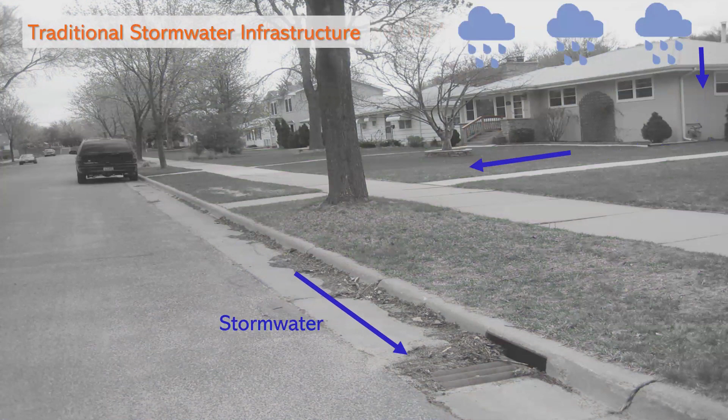But what we really have is traditional stormwater infrastructure in our communities, and it's really adapted to manage the stormwater. It really takes the rain off your roof, down the sidewalk, and into a storm drain. And we don't really think much about that. But when we concentrate it like this, we're really pushing our issues downstream. We're just getting rid of it, and there can be significant problems.

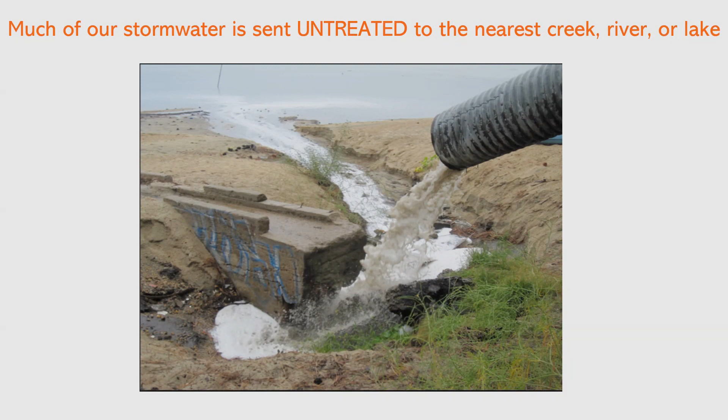What most people don't understand is that much of our stormwater that's coming off our roofs and our sidewalks and our parking lots is really going untreated into the nearest creek, river, or lake. And we're really having stormwater pollution issues. This is one of our bigger water pollution issues in our country. And you can see here, there's a lot of pollution happening.

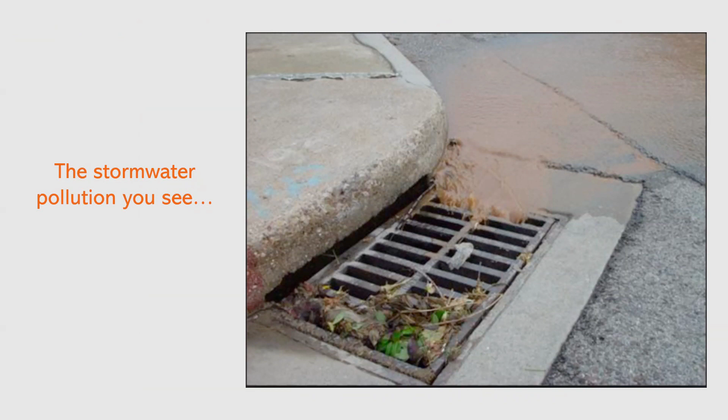Some of the things we can see: the dirty water, maybe a plastic wrapper, leaves and sticks going down the drain. But there's also a host of things that we can't see that stormwater is carrying with it. We have hydrocarbons from oils and leaks and drips from our cars. Our brake pads are producing copper dust that goes into our stormwater. That's really bad for fish and other aquatic animals.

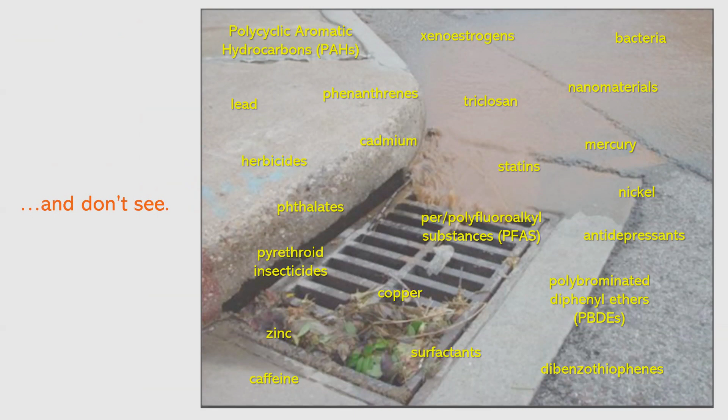We have insecticides and herbicides coming from our lawns. We have many heavy metals going down. We have things like PFAS that are going in from our water supply, and really they can produce really contaminating things. In addition, since we're concentrating the flow and just pushing it off our properties, what we can have is unintended consequences in terms of quantity of water coming down too, in too short of a time. So in many communities, particularly along the Great Lakes or in other communities with old stormwater infrastructure, we're having problems where all that water is just collecting and it has nowhere to go.

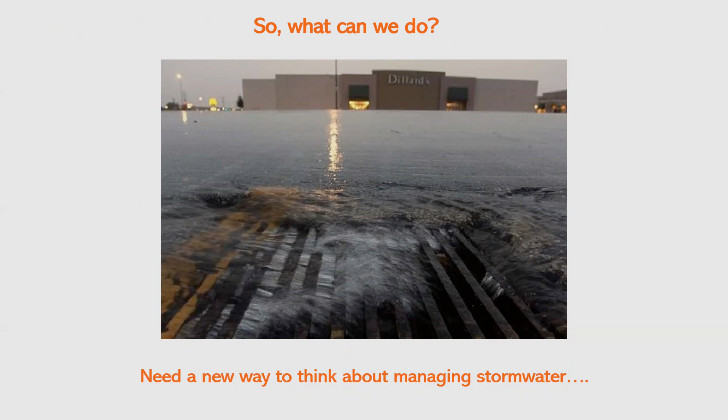And really causing some flooding issues locally in our communities. So what can we do? Well, what we really need to think about is a new way to think about managing stormwater. Right now we're just putting it all down the storm drain into the gutter and out into the nearest creek. Instead, we need to go back to about third grade and think a little bit more about the water cycle, how water moves in our atmosphere and across our land in general.

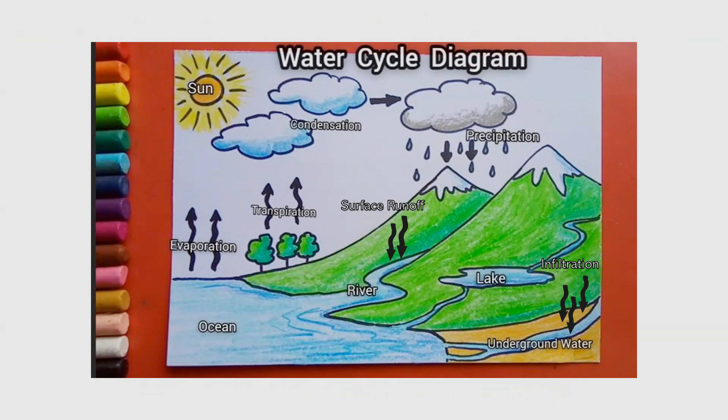So thinking about how water moves in general: it rains, it comes down, condenses on the land, and then runs off the land to your nearest creek or river, and eventually out to an ocean or a lake. On the way, it's stored, infiltrated into the ground into our groundwater, or it's stored and then evaporates, or the plants uptake it and it's transpired back into our atmosphere. So really thinking about the hydrological cycle that influences how water moves about on our landscape.

And that's really what we're thinking about when we're thinking about how to manage stormwater differently. We want to manage it as a resource rather than a waste, just trying to get rid of it.

So this is the Menomonee Valley Industrial Center Stormwater Park, built with green infrastructure in mind. This used to be the machine shop of the world in the 1800s and 1900s, and it was a brownfield site, very polluted in general. They turned it into an amazing 60-acre industrial park that has over 14 businesses, and all of their stormwater moves through this incredible wetland system designed to treat the water before it goes into the Menomonee River.

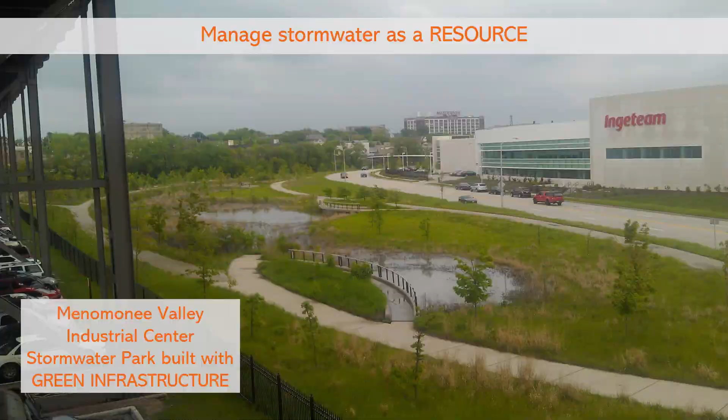So what is green infrastructure actually? Well, it could be natural landscapes, like floodplains, river systems, forests, wetlands, and fields. That could be green infrastructure because it's soaking up that water.

But in this context, what we're talking about today is really these engineered water management systems designed with natural features and functions. They're designed based on the hydrological cycle—how do we capture that water, soak it into the ground, have plants uptake it, really slow that water back down rather than shooting it downstream.

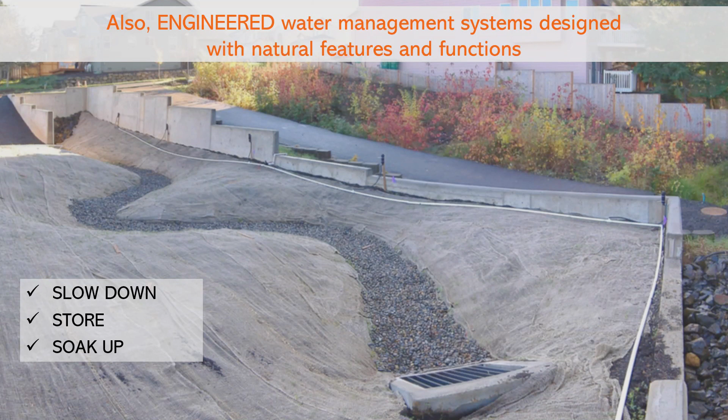So these are the principles we really want to work on integrating into stormwater management. One of the biggest principles is using native flowers and grasses. And you can see here why.

So we're really going to use the power of plants to actually store the water, soak it up from the ground, and get it into our groundwater.

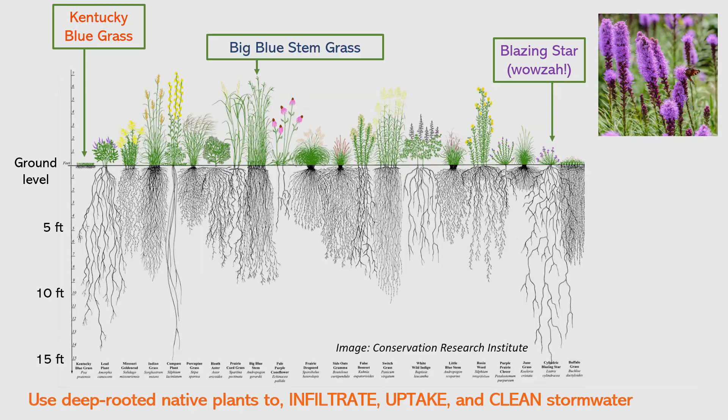Okay, so let's talk a little bit about green infrastructure systems. We can put them—there's many different kinds—and we're going to start at the top of our built environment, our roofs. There are many applications in general.

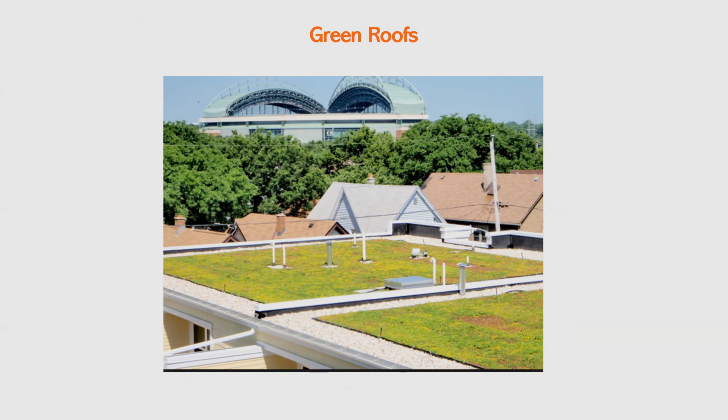So green roofs really are putting plants on top of the roofs. We have an impermeable layer, and then they capture that water, infiltrate it, and use transpiration through the plants to go back into the atmosphere.

They have enormous year-round energy savings for buildings because they provide an insulating factor. So in Wisconsin, we can insulate the building, and you can find a lot of energy savings just from heating and cooling. When it's hot in the summer, the plants take that heat and cool the building down, and in the winter, they provide an insulating factor. So the city of De Pere has found those energy savings from putting it on their city hall.

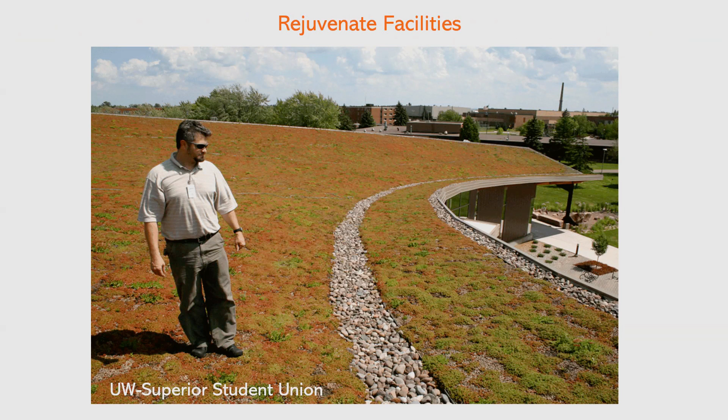They've also been used across Wisconsin in different environments to rejuvenate facilities, modernize buildings, and provide educational spaces in general. Where I am locally in Green Bay, one of our hospitals has a public green roof. It's for their employees, but it's also for the public and their patients, really supporting that interaction with nature and how that supports our health in general. It's a really wonderful space.

So really capturing that water. Going down the building, we can have green walls, kind of the same thing as a green roof, but you're capturing water as it goes down the wall and using it in aesthetic situations. You can have very intricate systems where art meets the master gardener, really using that water as a resource to water your plants.

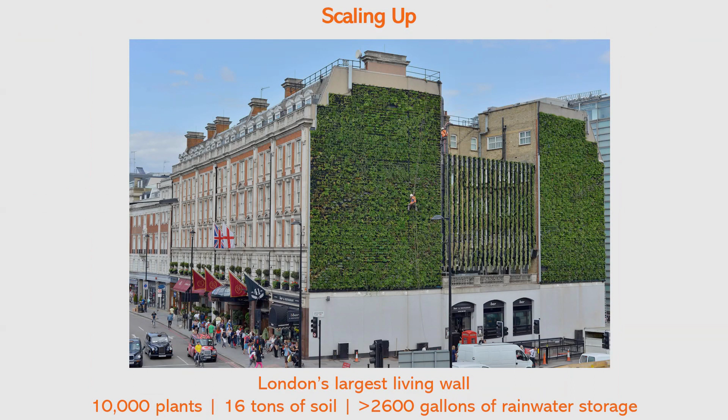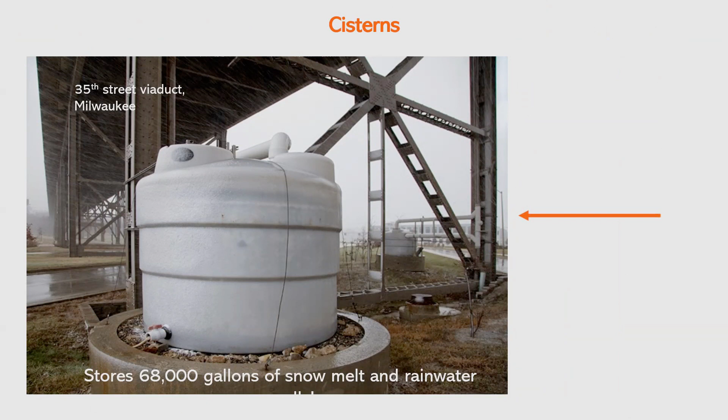You can see the water coming down off the road and then going into those pipes and into the cistern, where it's later distributed.

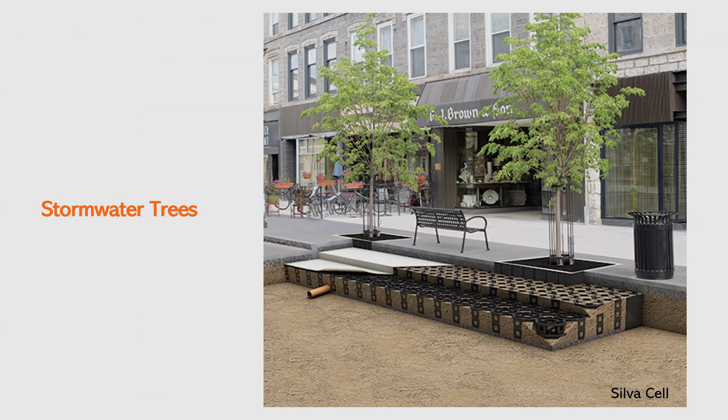Bioretention systems are also known as rain gardens at a smaller level. They are depressions in the ground, and what they're meant to do is collect water from a surface area and then slowly infiltrate it or have the plants take it up. These aren't permanent waters or ponds or anything like that; they're supposed to drain out within 48 hours at the most. These can be put anywhere on the landscape, and they're very, very versatile.

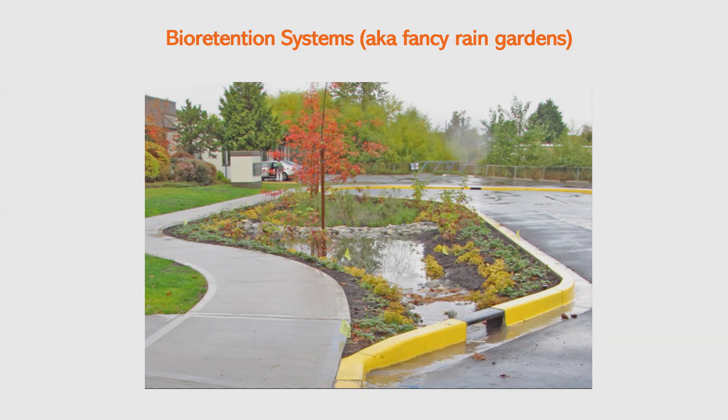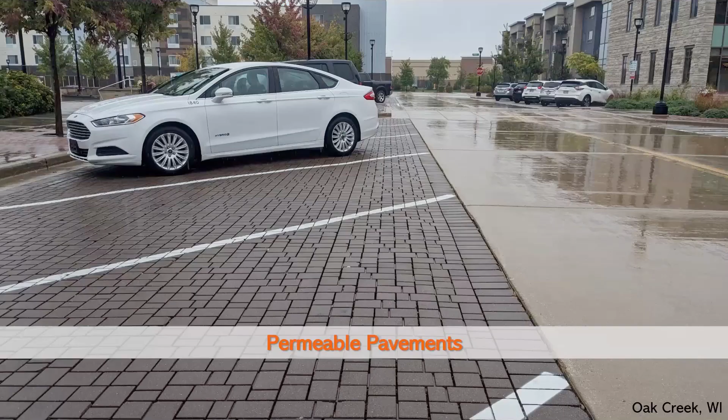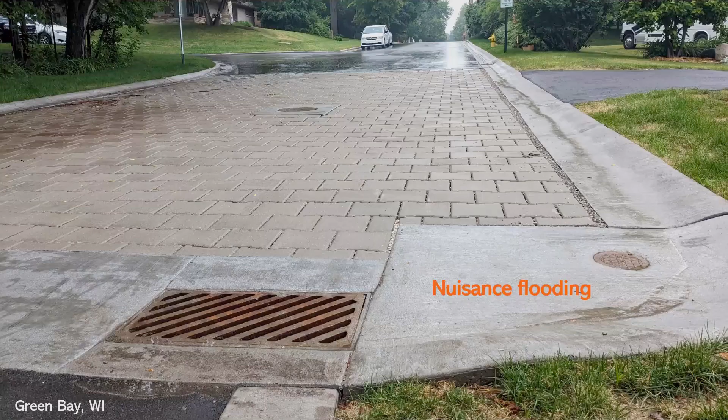Another really great green infrastructure practice, which does not involve plants but really focuses on infiltration and water storage, is permeable pavement. These come in many different products—pavers, porous asphalt, and so forth. They really help. You can see here it's raining, and on the traditional concrete road, the water is not soaking into the ground, but in that permeable pavement, there are gaps in the pavers, and the water is soaking down and infiltrating into the ground immediately at its source.

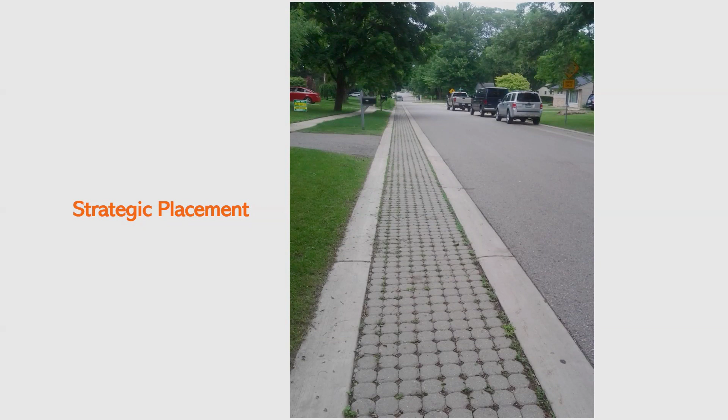Some of these pavers can be placed in certain locations, for example, to reduce nuisance flooding, so the water's not concentrating and building up in our storm drain but is going down immediately. Here's a different paver product. They can be placed strategically, so they don't have to cover the whole road, but maybe just the parking lane or a bike lane, where you can grade the water into.

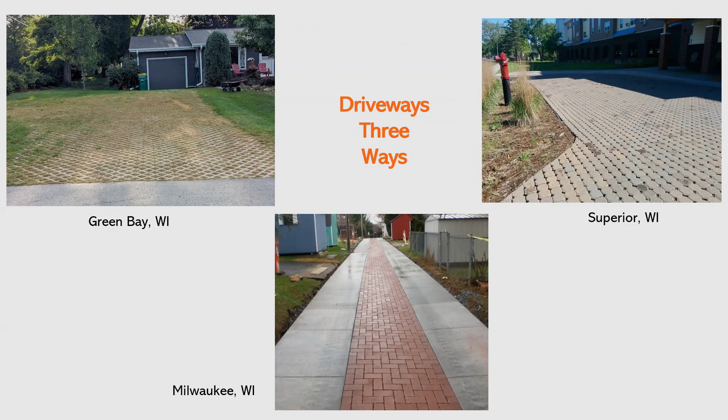I'll mention a couple things that don't require engineering, which we can do very easily—replacing turf grass with native flowers. We looked at those root systems before. Where on our landscapes can we put in a pollinator garden and take away those short little root systems, really infiltrating the water there? These are simple things we can do across all our communities, whether it's our homes, businesses, or park systems.

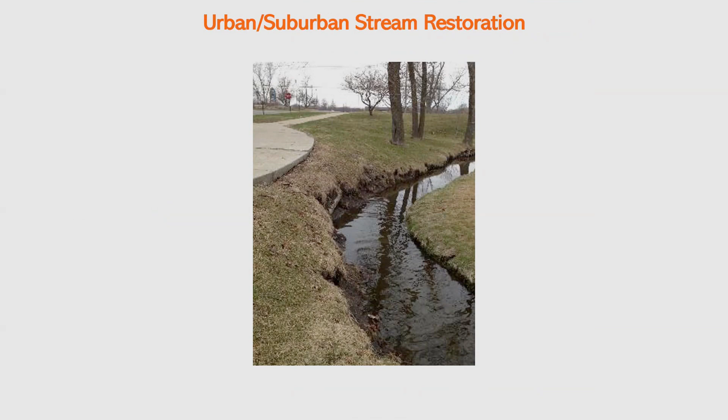Thinking about doing this specifically along our most vulnerable areas, directly into our waterways—where can we actually restore, improve, and buffer stormwater from getting into our local creeks and rivers?

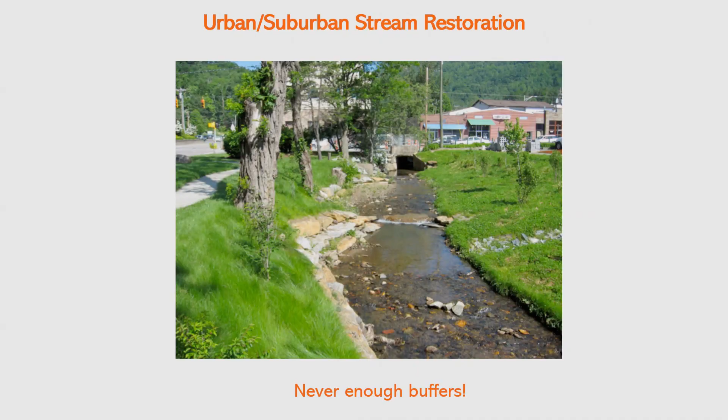Getting started is really easy. There are many different types of green infrastructure practices, and it depends on your community's goals and how green infrastructure can meet them. I've introduced some examples, but where in your community could you see the combination of treating stormwater, managing flooding, and also gaining these other amazing benefits that green infrastructure provides?

And that's it. I want to thank you so much. I'm happy to have people reach out to me if they have questions about green infrastructure or are interested in getting things started in their communities.